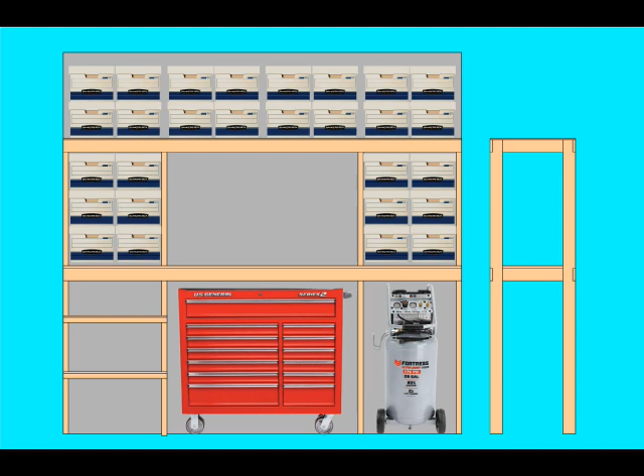Today we're building storage shelves for your garage or basement that provide a maximum of storage capacity with a minimum of space, and even better, at a minimum of cost. And for a bonus, they can be built to include a sturdy workbench and can be easily accessorized to add even more workspace and storage capacity.

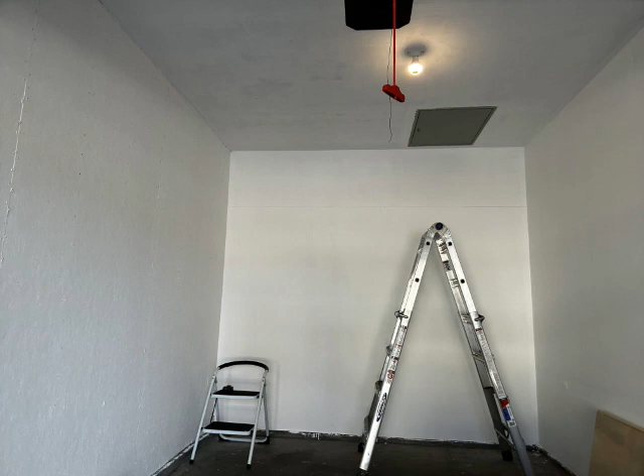In this first of two parts, we'll help you to adapt the design to fit the space that you're using, and then walk you step by step through the building process for the basic structure. In the next video, we'll show you how to add to that structure if you'd like, to make it even more perfect for your own workshop or storage space.

The concept that makes this unit special is the application of engineering principles to reduce the size and the amounts of wood required without sacrificing structural strength. This keeps the cost of the project down and maximizes the use of space.

Like most DIYers, I've built many shelves and workbenches over the years, and my usual go-to plan for making them heavy-duty was simply to add bulk to the wood sizes. Many a bench has been built of 4x4s and multiple layers of MDF, and they all weigh a ton and take up a ton of space.

This time, however, I was tasked by my neighbor Piper to build a shelf unit in her garage that would double as an equipment storage unit and also a workbench. Hers is a single-car garage, so the unit was limited by that dimension in width. But in that space, she needed enough shelf space for storing not only a lot of household items, but also a rolling tool chest and a compressor.

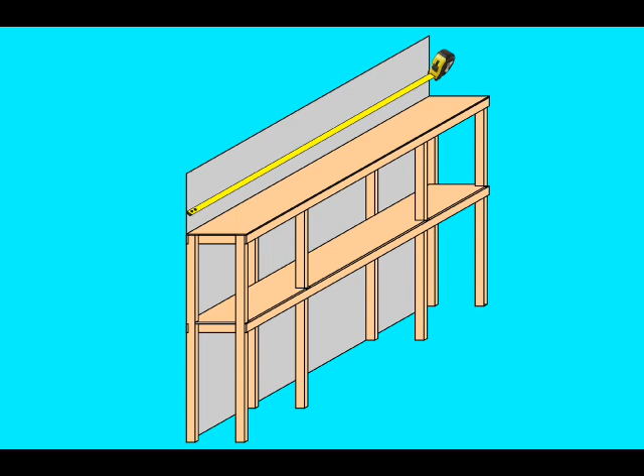As always, it's best to start with a plan, so I measured the rear wall of her garage, shown here in gray, and made scale drawings of the space. I also added scale images of the tool chest and the compressor so I could set the height of the lowest main shelf, which would also be a workbench, and also the position of the vertical posts.

Note that the shelves in this case are only ½ an inch thick, but they're faced with a 1x4 board, which is part of the structural concept. For a stronger bench, you could substitute thicker plywood at an increased cost. Also note that the posts are 2x4s.

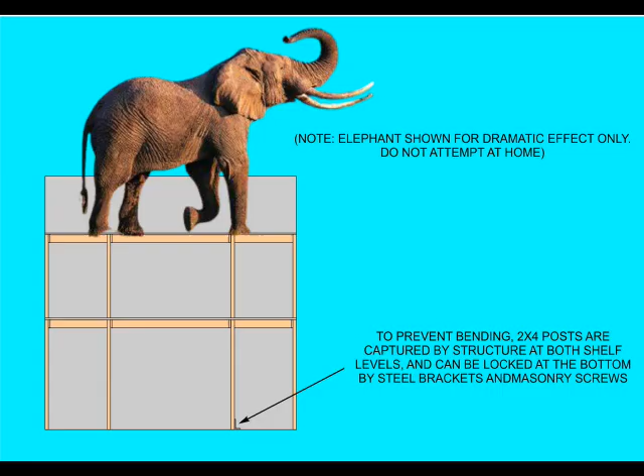This keeps the footprint of the posts small, and as long as they're properly supported, they'll carry a surprisingly large load. In fact, a single regular 2x4 is rated to support as much as 1,000 pounds vertically as long as it's supported to prevent bending. And since we're using 8 of these 2x4 posts, that's a combined weight-bearing capacity of 8,000 pounds, which coincidentally enough is about the weight of a small elephant.

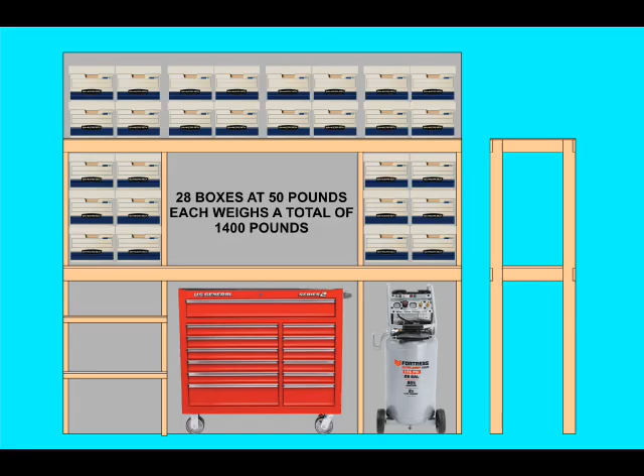And of course, I wouldn't sit under that structure with an elephant on the top bench, but the point is made. The heaviest box of storage materials that I have is some reloading equipment, and that box weighs about 40 pounds. And most of my wife's decorating materials have an average box weight of less than 30 pounds, and I think the heaviest one has candles in it, and that might be 35.

So theoretically, if I filled up all 28 of these boxes with 50 pounds each, which is a lot, I'd still only have a total load of 1,400 pounds, which is so far below the capacity of 8,000 that I hope you begin to realize how overbuilt so many garage benches and storage shelves are.

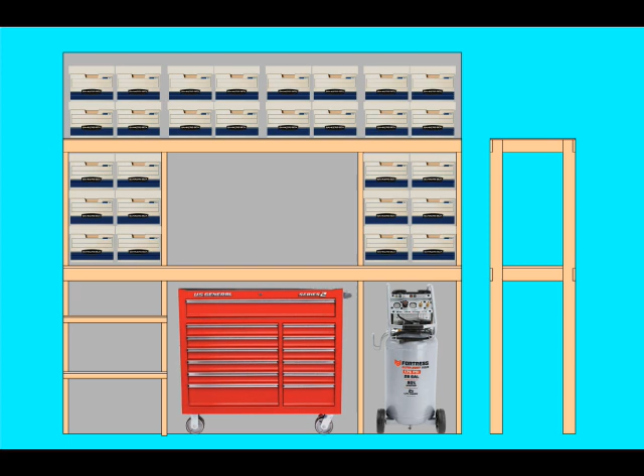Now that we've discussed the structural concepts of this unit, let's take a look at some of the more specific design features that you might want to modify to suit your own particular needs. If you're planning to use the center area to store a tool chest, as shown here, don't forget to include enough space on each side to be able to parallel park it against the back wall.

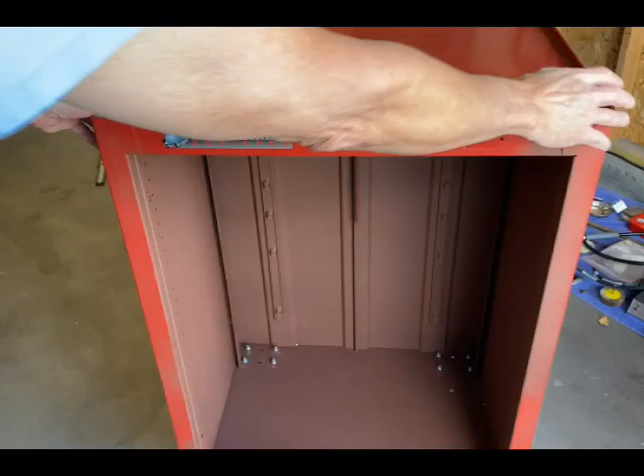If you've modified that tool chest to have 4 castering wheels, as we showed in a previous video, this is less of a problem. But a standard chest will require a few inches on either side, so set your vertical post distances accordingly.

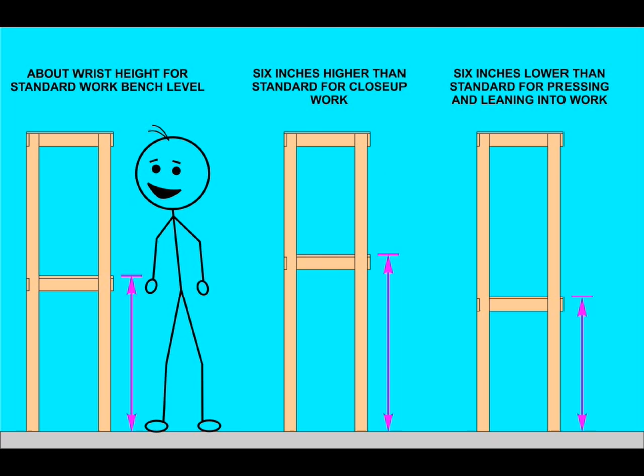Also, if you're going to use the lower shelf as a workbench, the height would ideally be lower than the one shown here. It's necessary to have a high bench top in this case to accommodate the tool chest and the compressor. But if you don't have those requirements, you can lower the bench to a comfortable height. In this case, a stand-up workbench is fine for the purposes that we're building it for.

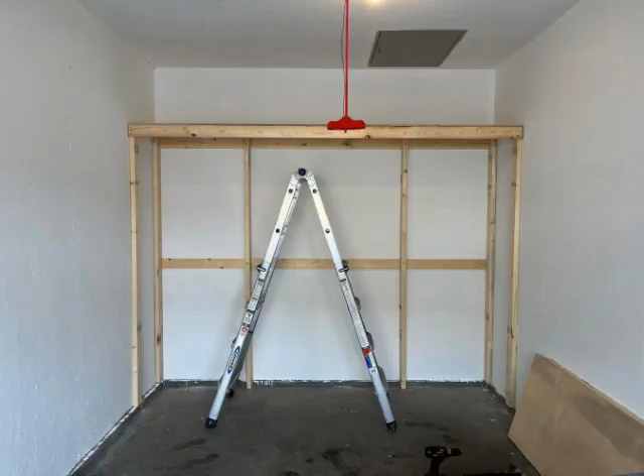Once the height of the lowest shelf and the spacing of the 4 vertical posts is decided, the other shelf position, the upper one, is determined by your ceiling height. We built this one to allow a double stack of banker's boxes because we had enough ceiling height for that. Banker's boxes aren't just a random choice for planning purposes either.

The ones shown, which are Storfile 701s, are a great way to organize your household and garage storage. I keep many of my specialty tools and equipment in them, and my wife uses them to store all of her seasonal household decorations. She likes to redecorate for every holiday or season change, and the banker's boxes allow her to swap their contents each time she redecorates.

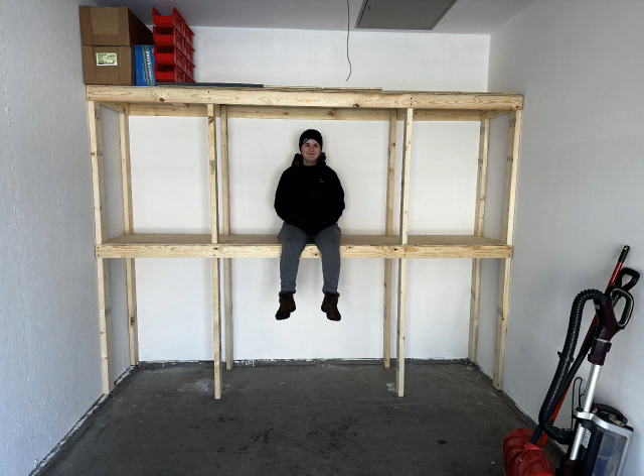So in this design, I used the dimensions of the 701 box to determine the shelf height and also the shelf depth, which is 2 feet. And so, with all those goals in mind, we set about building our shelves. We had no problem meeting all the design requirements, but we did go over budget. Piper didn't want to spend more than $200, but I think the total price came in right around $225, well under $250 in any case.

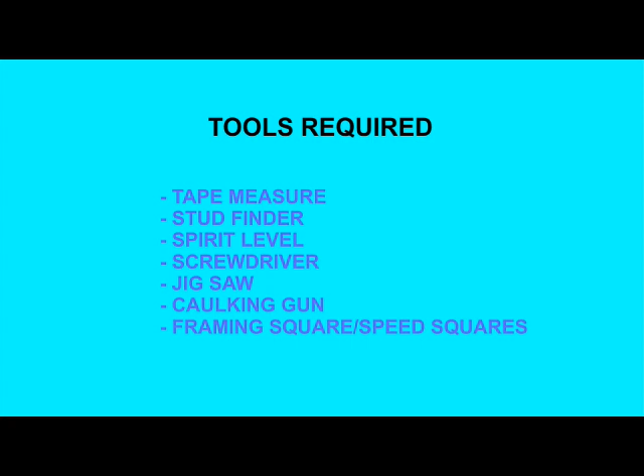We're still in the middle of winter right now, and she's going to wait for warmer weather to finish painting the shelves and adding a few extra features, but she's happy with the results so far, and so am I. Now let's walk through the building procedure step by step so you can see how we did it. Here's a list of the tools we used. Nothing special or expensive, and of course you can substitute whatever you prefer. You might not even need that stud finder depending upon what type of wall you're mounting these shelves to.

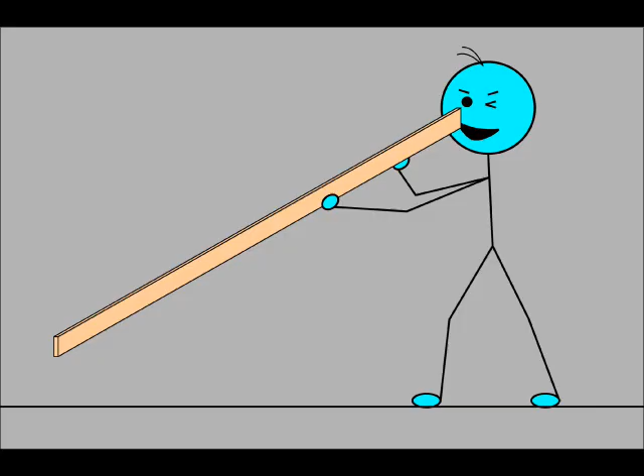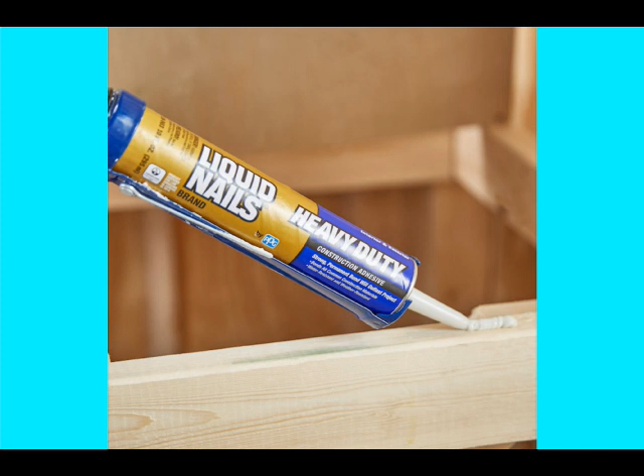Also, while you're at the store, if you can, have them cut the plywood down to the width of your shelves. In our case, we needed the shelves to be 2 foot wide to accommodate the banker's boxes, so we had both of these sheets sawn right down the middle. Now, even though you could technically assemble this whole project with screws alone, don't neglect the construction adhesive that we're recommending. The product we use is Liquid Nails. It's a very common product, but it's essential to getting the full strength out of these lighter weight materials.

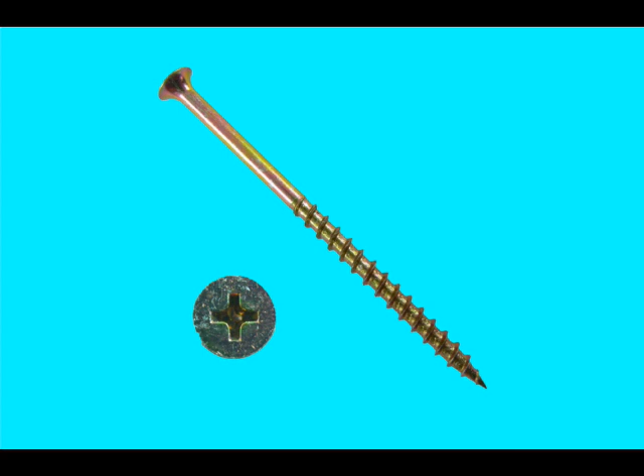Of course, you will need some screws, and we use drywall screws in several lengths, plus 8 lag screws. The length of the drywall screws could depend upon your choice of plywood thickness, so I recommend that you review the construction steps and adjust your needs accordingly before you go to the store. Actual construction begins with installing a pair of those 1x4 boards against the back wall of your garage. Now keep in mind that no garage has perfectly plumb walls or a level floor. So just pick one side or the other to take your measurements from, and then once those measurements are established, we will level these boards to those measurements.

Now, you have to decide a few things. How high will the workbench or the lower shelf be? 38 inches is a comfortable height for a bench, but in our case we had to go higher, as we said earlier, to accommodate that tool chest. Once you've picked a dimension, you have to live with it because these boards are going to be attached very firmly to the walls, so make sure you're happy with it before you move on. Then above that, we need as much space as necessary to accommodate sizes of boxes or other storage.

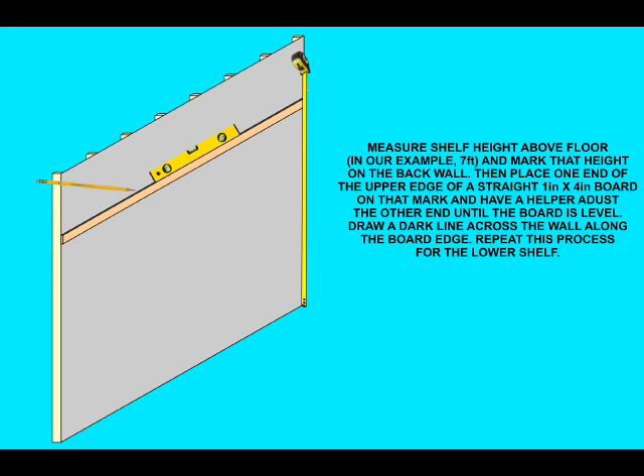You need to pick one side of the room, let's say the right side in this case, make your mark, in this case 7 feet from the floor, hold the board up to that mark, put a level on the board, and then have your partner move the other end of the board up or down until that level is perfectly straight, and then draw a nice dark pencil line across the top of the board. Make a line for both of the shelves, both the upper shelf and the lower bench shelf, and we're ready to move on to the next step.

Now that we have a couple of lines drawn on the wall to tell us where those boards are going to be attached, we need to decide how to attach them. We're illustrating here a stud wall, and that's where your stud finder comes in, and this will give you a good strong installation by using 1/4 inch lag screws to about 2 inches long, could be longer. If you use lag screws, be sure to put some large area washers under the head of the screw so you don't crush the wood too much while you're tightening them down.

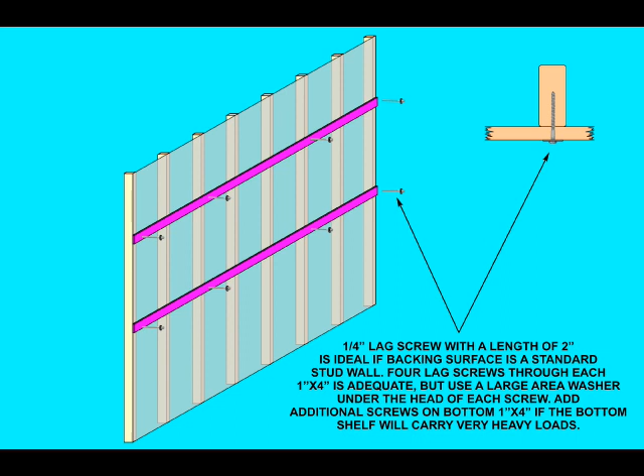Now take your time doing this. Make sure these boards are exactly on those lines you drew and that you're happy with how straight and level they are. These 2 boards form the foundation for all the rest of the structure, so we need them to be perfectly straight and level so that the rest of the assembly looks good.

Now we're going to take 4 of those nice straight 2x4s you bought and cut them to the exact height of that upper 1x4. Now don't forget that these 2x4s will all be slightly different lengths because the floor is sloped. Just put them up one at a time in the position where they're going to be attached and mark their tops where that top meets the upper edge of the upper 1x4, and then make your cut at that point. Once you do have all of them cut to the correct height, I recommend that you either number them or mark them in some way so that you can be sure to put them back in the same position when you're ready to screw them on.

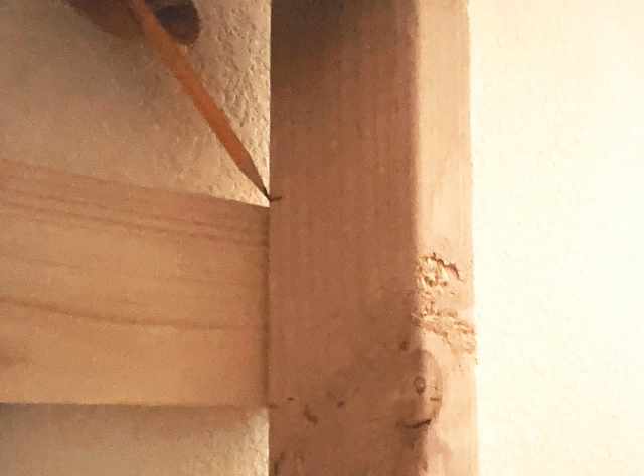Now you don't absolutely have to perform the next step, so look ahead through this process and decide if you really want to. We're going to notch these boards to set them back up against that rear wall of the garage, and the reason we're doing that is it gives us a little more open space in the second shelf, the lower shelf. If you don't make these notches, these boards will intrude on that space, and I was looking to gain every square inch I could, so I went ahead with this process. To make these notches, push the 2x4s back into position where they're going to be up against those 1x4s, and use a pencil to mark where the notch will have to be cut.

Once you've done that for all 4 of the 2x4s, you can lay them down on their side and use a scrap piece of 1x4 that's left over when you cut them to length, and use that to set the rear side of the notch. Make a nice dark pencil line because that's going to be our cut line.

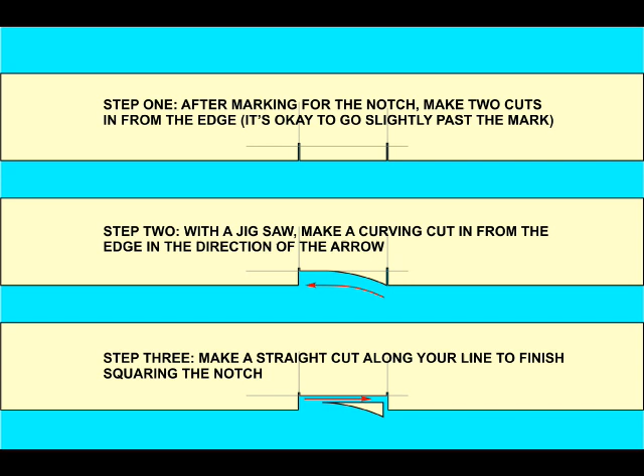Now you could go ahead and use an ordinary handsaw and a hammer and chisel to make these notches. I chose to use a jigsaw, and the simplest way that I know of to do that is to start with making a couple of cuts at each end of the notch as shown in the top drawing, and then I come in from one side with the jigsaw in a curving arc and cut over to the left side until that piece breaks away, and then come back in for another cut coming in from the right to straighten that cut over to the other side of the notch.

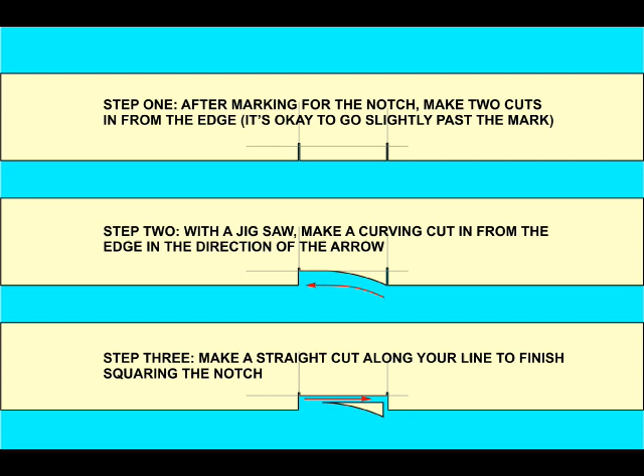Now you'll need to put each one of those boards up into position to check the fit of the notches, and don't be surprised if it's too tight to fit in some areas. Go ahead and enlarge these notches as much as necessary to make it an easy fit.

Also, don't be dismayed if these boards don't fit perfectly flat against the wall. Very few walls are actually flat, and in the case of the one we were working on in Piper's garage, that wall had more waves than Pismo Beach, and there wasn't any way we were going to get those boards to sit straight up against it. Once the whole thing is assembled, you can hardly notice any gaps like that anyway, so just don't worry about it.

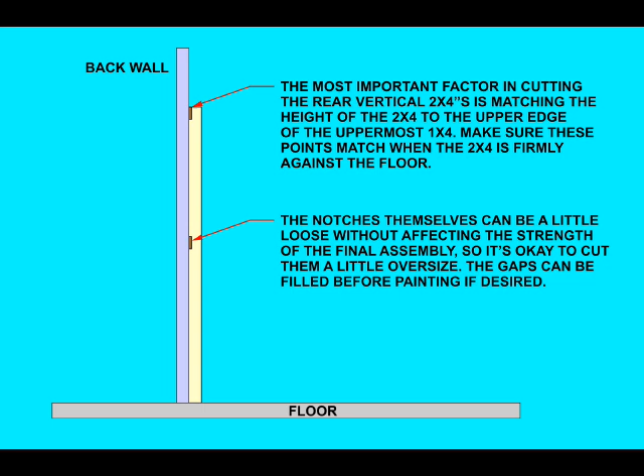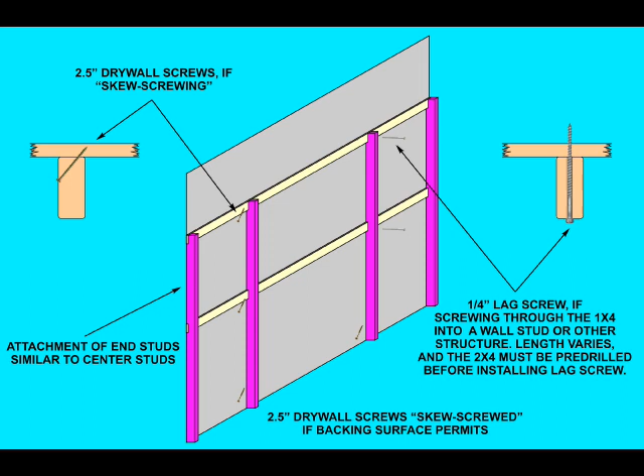The way we attached our vertical 2x4s was to angle the screws, a process called skew screwing, to anchor them to the 1x4s, and in fact our screws went on through into the 2x4 studs in the wall behind us. Of course, there's other ways of doing this, and you could even use lag screws, as it shows on the right side of this drawing, if by some miracle your 2x4s happen to be right in front of a stud in the back wall. Regardless of how you attach them, though, this is the final result, what you should see at this point in your construction.

I also recommend that you choose white as your color, and we picked the whitest white we could find and bought several gallons of it. In a garage, it's my belief that there's never enough light, and basically anything that's white in your garage is reflecting light and making it brighter, and anything that isn't white is basically sucking up the light and making things darker. So white is always my go-to choice for garage workshops.

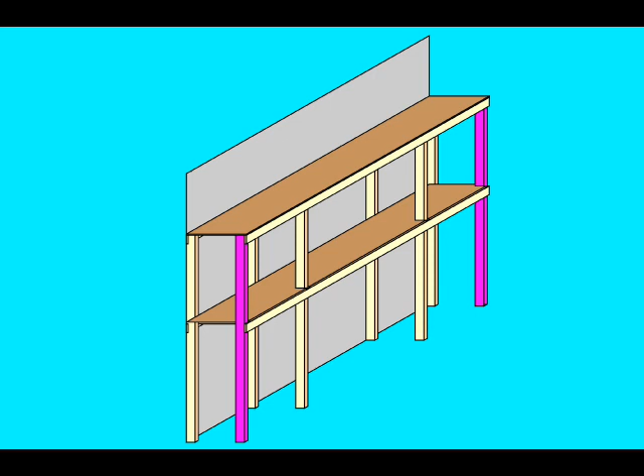Next up in our construction sequence are the two vertical posts that will support the front of the shelves, shown here in pink. These actually, on our set of shelves, will be attached to the walls on each side of the garage, but there are some options that we'll discuss later if you need one of these posts to be freestanding.

First, we have to decide how far they have to be from the back wall, however, and in our case, for these shelves to be 24 inches, these posts must be installed so they are 23 1/4 inches from the wall to the front face of each 2x4. That missing 3/4 of an inch, 0.75, will be the thickness of the 1x4 that we use as a fascia board for both the top and bottom shelves.

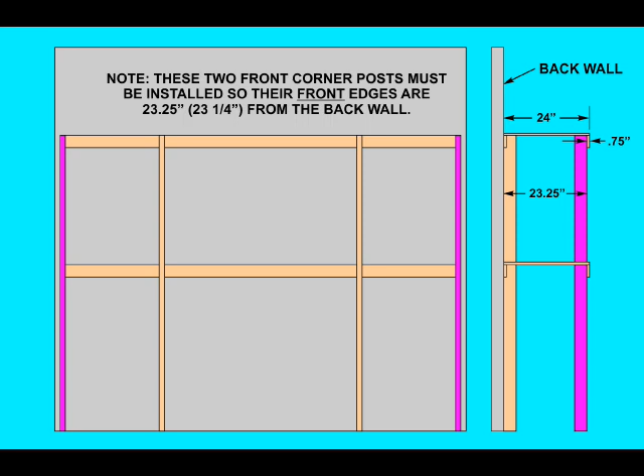So if you're going to build shelves that are 2 feet wide, these vertical posts must be 23 1/4 inches from the back wall to the front of the post, as shown in this drawing. Make sure you study that and understand it before you proceed.

For our shelves, we measured that 23 1/4 inch dimension on each wall, the right hand and the left hand walls of the garage, and then we placed our 2x4s in that position at that dimension from the back wall. We then held a level up against the post vertically to check it for plumb, to make sure that post was absolutely straight up and down, and then made a mark along the wall so that we knew where that post was supposed to be when it's finally installed.

Then it's a matter of cutting the post to length, and to do that we laid a level across from the back post, as you can see in the upper right hand corner, and marked where that level, with the bubble centered, crossed the 2x4.

Now, before we move on to the next step, I did mention earlier that these posts don't necessarily have to be attached to walls. This way we're doing it here is suitable for a one-car garage, but if you're in a two-car garage, one of those posts can be freestanding, and I suppose you could have both of those posts freestanding if your particular workspace happened to require it.

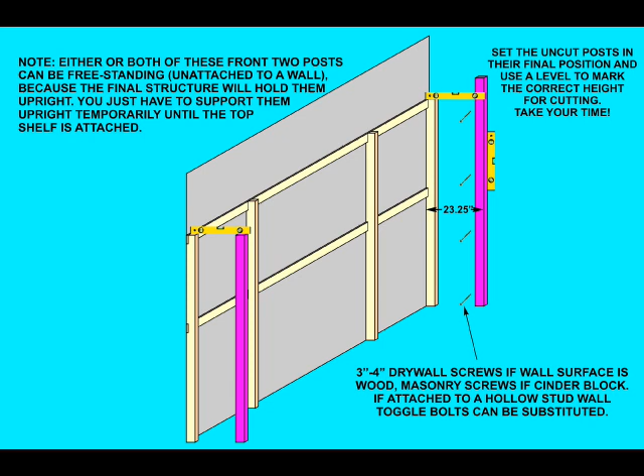You will, however, have to come up with a way to keep those posts in position until we can get the top shelf installed. And don't be concerned about strength. These posts don't need the walls to support them. It's just a convenient place to hold them while we're getting that top shelf installed.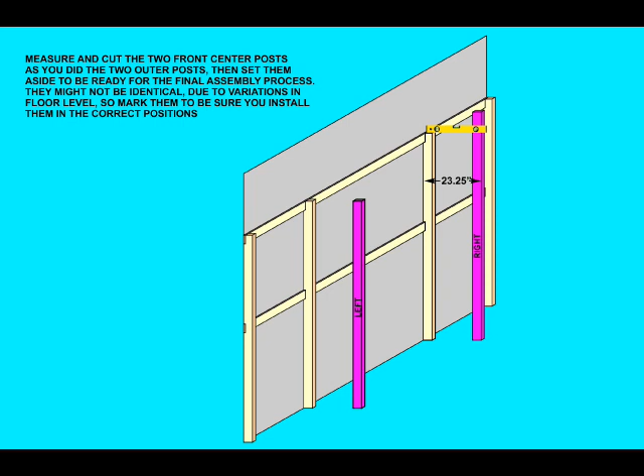Next, we're going to cut the two center front posts to length in the same manner as we did for the side posts. Now once these are cut, we're not going to install them yet. You can just put them aside until later, but you really should mark them so that you don't mistakenly swap them around. In other words, once you've cut them, they're a custom fit for that location, and they shouldn't be moved to another position.

Now that all the posts are cut to length and the outer posts are installed against the walls, it's time to build and install the top shelf. Now, since the length of the shelves that we're building is just a little under 10 feet, the 8-foot piece of plywood that we have cut is too short to make the full shelf length. This is what those two short pieces labeled the top and bottom shelf end sections are for in the second sheet of plywood that we purchased.

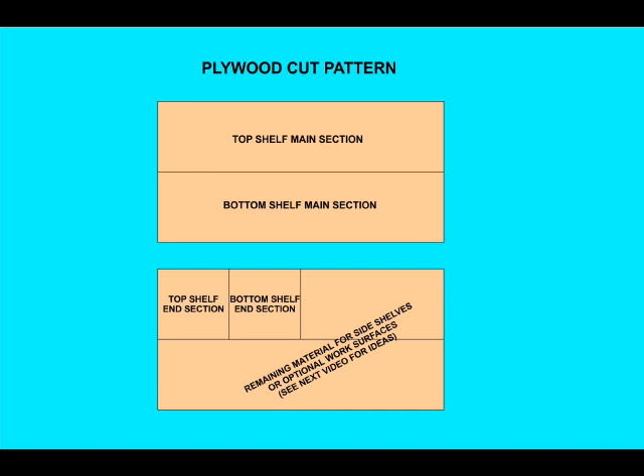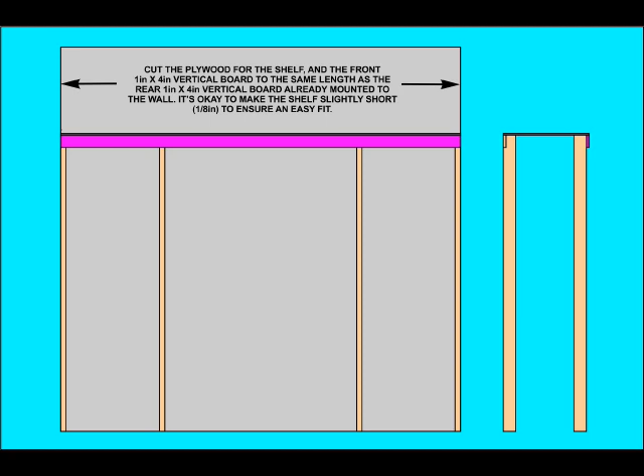Now we can't be exact about the length without measuring the precise space between the left and right walls of our garage or the work area that you're building into. So each of these shelves is going to be custom fit again to the space required. In our case, the total shelf length is going to be 114.5 inches. And since the length of the plywood board is 96 inches or 8 feet, we will subtract 96 from 114.5 to give us a remainder of 18.5 inches. That will be the required length of the top shelf end extension, and we're going to go ahead and cut that with the saber saw.

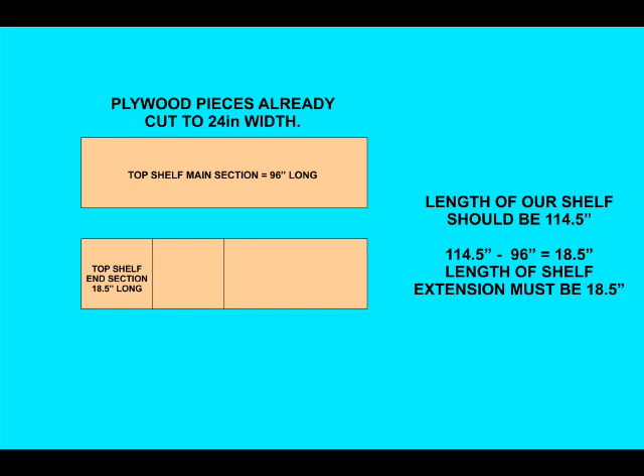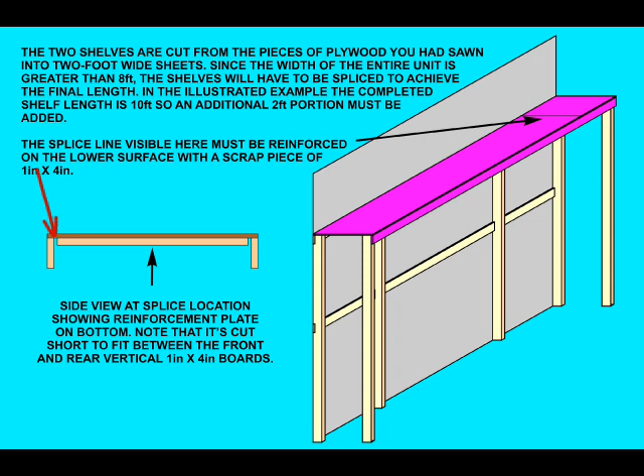As it shows here on the left side of the drawing, we're going to use a piece of 1x4 material as a splice plate to hold the ends of these two pieces of plywood together until we get it up into position. Now notice in that drawing that you need to cut that splice board so that it fits between the 1x4 boards at the front and the back of the shelf. Notice that I've drawn it with a pronounced gap at the front and the back of that splice plate to make sure there's plenty of room for those vertical 1x4 boards.

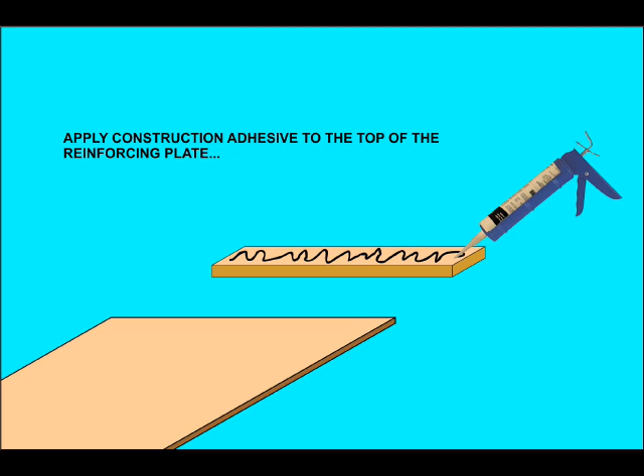Now it's time to break out that construction adhesive and load it into your caulking gun. Spread a good amount of this across the top surface of that reinforcing plate, and then carefully lift one end of your main shelf section for the top shelf, that's the 8-foot long board, so that it covers half of that reinforcing plate. While you're moving that piece of plywood into position, I recommend you place some scrap pieces of 1x4 material under it to help hold it level, and then fasten it down with 5 or 6 1 to 1.5 inch drywall screws to hold it tightly in place while the construction adhesive sets.

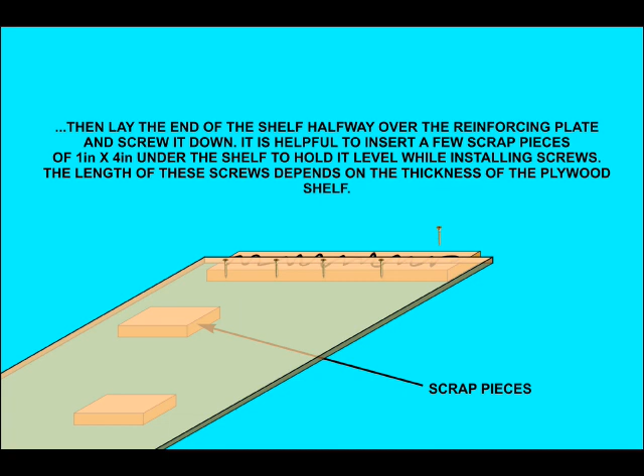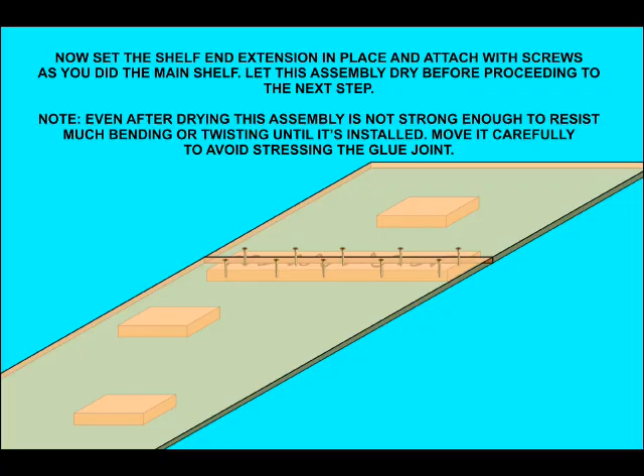Before that glue does set, however, bring your extension piece, the one that we cut to 18.5 inches, and push it tightly against the end of the main piece of plywood. Then screw it in place in a similar fashion, and then leave that assembly for at least an hour or two to dry. When you're finished, that joint should look something like this, with virtually no gap visible at all.

The next step is to finish assembling the top shelf, and we do that by adding the 1x4 fascia board. But before we screw it on, we want to run a bead of construction adhesive down the entire top edge of that 1x4 board. Now this can get messy and it's kind of hard to clean this stuff up, so I strongly recommend that you make a thin bead when you do this. In other words, don't apply too much glue because it's going to squeeze out and you'll have a mess to clean up.

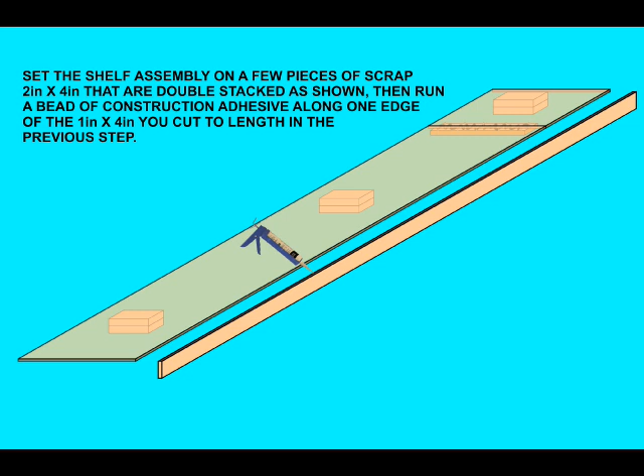Notice that I show the shelf is sitting up off the floor on some scrap 2x4s. And I did that just as a convenience to make it easier to get that 1x4 underneath it and attached without smearing too much glue around. Once you have the 1x4 safely in position under the edge of the plywood, you can go ahead and screw it down. Now you can use 1 inch to 1.5 inch screws, but use plenty of them. I think we put about 1 every 6 inches on the shelf that we assembled. The reason we use so many is I want that glue to have a good strong bond, and the screws are primarily there to hold the two parts together until the glue sets.

Double check while you're putting the screws in that the 1x4 board stays flush with the front edge of that piece of plywood. The more accurate you are with the alignment of this assembly, the stronger and more attractive the final structure will be.

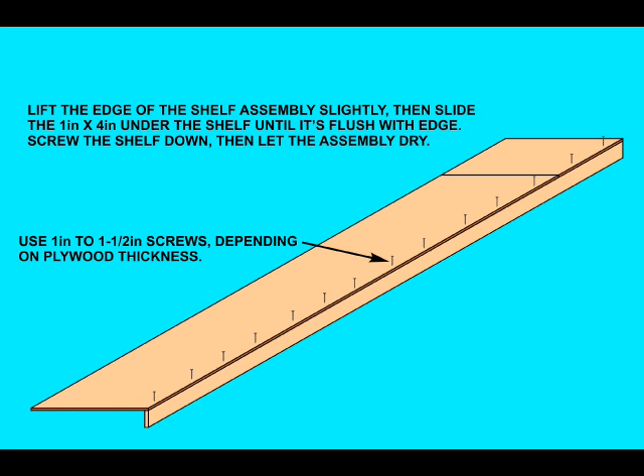Once that completed shelf assembly is dry, it's time to lift it up and put it in position. It's definitely a good idea to have 2 people and 2 ladders to do this to keep from bending the shelf too much until you get it up against the wall where it's supported at the rear by that 1x4. Once you do get it in position though, you can screw it down, and I don't recommend that you put construction adhesive along that back 1x4 board for the simple reason that you don't need it. It's held rigid by being attached to the wall, so it doesn't have a problem with flexing. Just secure the rear of the plywood with some of those 1.5 inch screws down through the plywood into the 1x4 like you did on the front face.

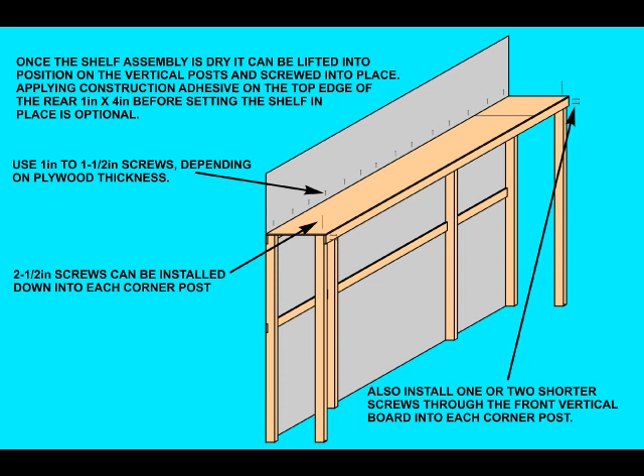Now take a couple of 2.5 inch screws and drive one down through each front corner through the shelf into the 2x4 as it shows here. And then add a couple more of those 1.5 inch screws through each end of the 1x4 board into those same vertical 2x4s. At this point, that shelf is pretty strong even without those 2 center posts, and in fact Piper just climbed up the ladder and jumped on top of that shelf to put in the rear screws. I don't recommend that you do that because you really do need those center posts for full strength, but it did show how tough it is even without them.

And now we're down to the home stretch with this project. Time to assemble and install the combination shelf and workbench. Essentially, it has a lot in common with the upper shelf, but it's different in 2 very important ways. First of all, after we assemble the 2 portions of plywood, we have to notch them to fit around all of these 2x4 posts. Once we get those notches accurately cut and tested the fit of the plywood, we are going to insert the plywood shelf, clamp it into position, and then install the 2 center 2x4 vertical posts.

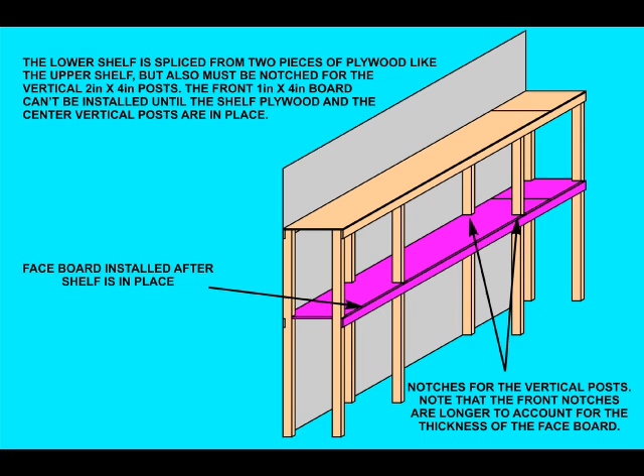Once we have the 2 center posts placed in position and checked for plumb, we will finally install the front 1x4 board, completing the whole assembly. Start building the lower shelf the same way you did the upper shelf.

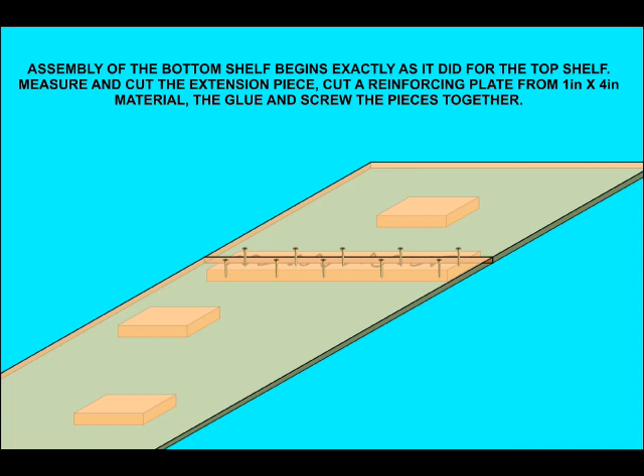First, measure from wall to wall the distance between the right and left ends of the entire structure. Then subtract 96 inches from that. The 96 inches represents the longer piece of plywood. Your remainder then will be the length of the extension piece that you're going to cut with your jigsaw, and then once you have that piece cut, you can attach it using the same process of a reinforcing plate on the back with some construction adhesive and screws.

Once that assembly is dried completely, we need to mark it for the notches to accommodate those vertical posts. There are several ways you could do this. I suppose you could just measure it all with a tape measure and transfer it onto the board, but we chose to lift the shelf assembly into place as shown here, and then marking the position of the rear posts on the back edge of the shelf.

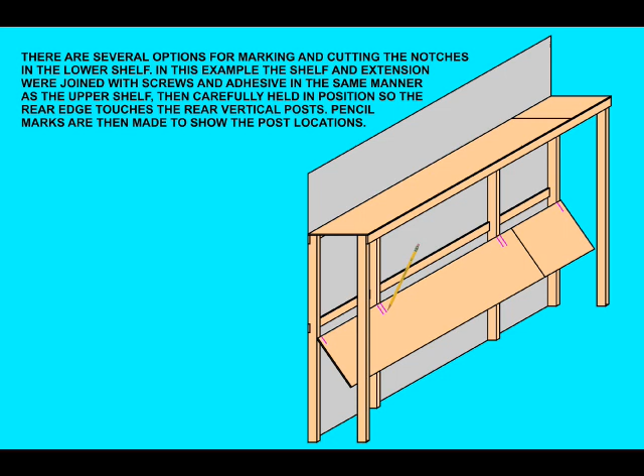Now we can set the shelf back flat on the floor and extend those marks that we made all the way across the board from the back to the front, the lines shown here in pink. Now use a piece of scrap 1x4 to make marks 3/4 of an inch back from the front edge of the board as shown. Now use a piece of scrap 2x4 to mark the ends of the slots for all 8 of the places where we're going to notch for the vertical 2x4s.

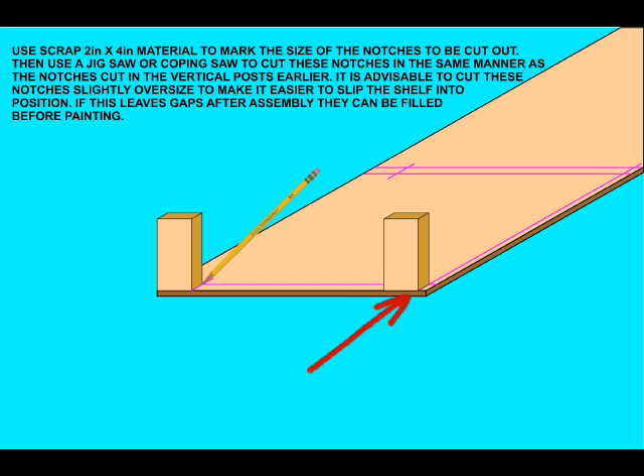Now test the fit of those notches by angling the shelf in the way you did when you were marking for the notches and see if they fit. And don't be surprised if one or more of those notches is a little too tight and you have to take it back out and enlarge it a bit with your saw. And if you accidentally make any of those notches a little bit too big, leaving a gap, don't worry, we can easily hide it. And in most cases you won't even notice once the whole thing's assembled anyway.

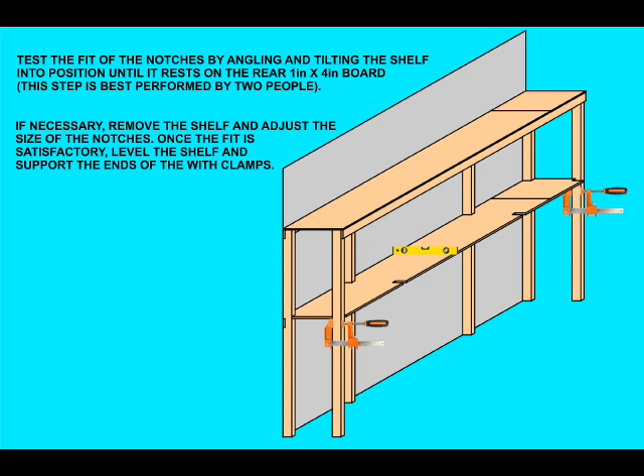Once you're happy with the fit, put a couple of clamps under the corner posts to hold it roughly in position. You can put a level across it at this point, but it's not important that it be perfect yet. Here's what ours looked like at this point, and you can see there's quite a bit of sag in the middle because we haven't got the front 1x4 in place yet. So that's why you don't really need to worry too much about leveling it.

We are using bar clamps. You can see a pair of them on the floor, and the two that are holding the shelf up are almost invisible. You definitely need a bubble level for the next step, so we started looking around for ours on the floor, and feel free to laugh when you figure out where we left it.

Now it's time to put in those last two vertical posts. Now be sure you put them in the correct position. We marked them carefully to make sure that we knew which one is on the left side, which one on the right. Angle them in at the top so they slip under that upper 1x4 and then slide them back into their respective notches. They should be a reasonably tight fit, but you may need a couple of clamps to hold them up in position.

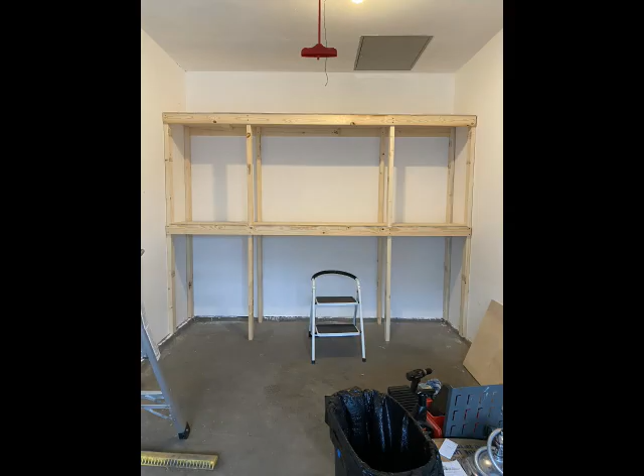Set a bubble level on each one in turn and adjust them back and forth until they're perfectly plumb. Before you attach them, however, step back and take a look at them. You'd be surprised how accurate your own eyeballs can be at aligning things. Even if they're not perfectly plumb, it's better if they line up with the rear posts. Regardless of whether those front posts are perfectly plumb, if they don't line up with the rear post, the whole thing's going to look a little wonky and your craftsmanship will be criticized.

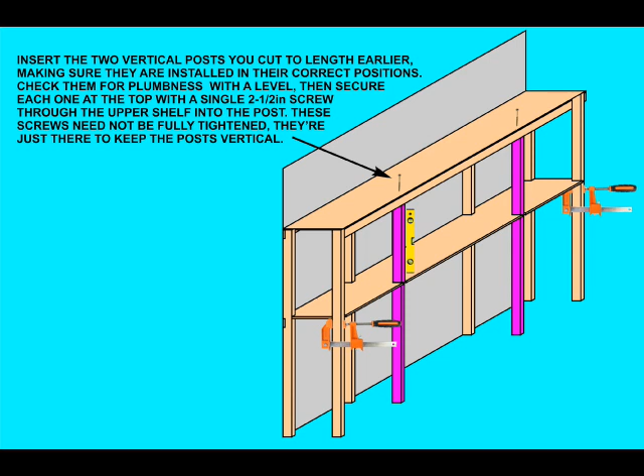Once you're happy with how those posts look, secure them at the top with a 2.5-inch screw. With those center vertical posts in place, we can install the 1x4 faceboard. This is going to take some juggling because there's already a couple of clamps, one at each end, holding that shelf up, and you're going to have to move them in order to get the 1x4 board in there.

First, run a thin bead of your construction adhesive along the top edge of the 1x4. Have your helper support one end of that shelf so you can take that clamp off. Then you can slide the 1x4 into position under that end of the shelf and clamp it in place. Do the same thing to the other end, and then loosen the clamps slightly one at a time and move each end up and down, watching your bubble level until you have that bottom shelf perfectly level and you're happy with it in its final position.

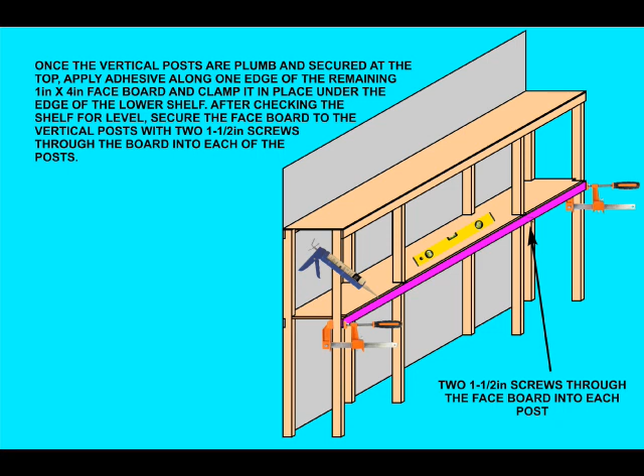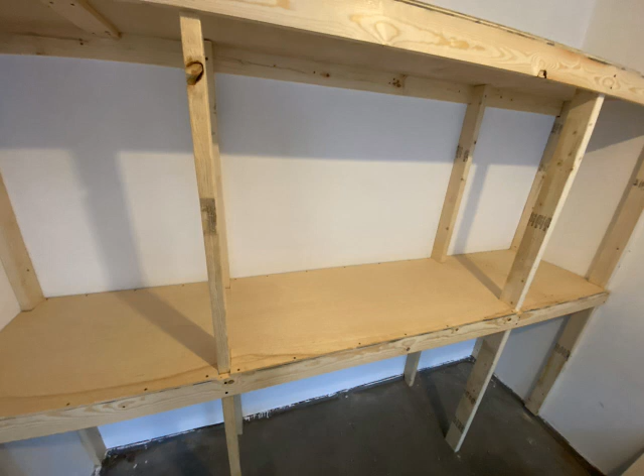Now drive a couple of 1.5 to 2-inch screws through the faceboard into each post, and then drive some 1.5-inch screws down through the plywood surface into the 1x4 rails at both the front and the back like you did for the top shelf. Hopefully all has gone well and your shelf assembly now looks like this. If you have any glue squeeze out, like you can see here along the top of our bottom 1x4, that sort of smudgy gray line, it can be wiped up with alcohol so you have a clean surface to paint over.

Additional minor considerations regarding aesthetics are these little spaces left over from cutting the notches in that plywood shelf. We just cut some little scraps of plywood and stuffed them in there with some construction adhesive. Once the adhesive sets up, you can sand those pieces flush with the rest of the material so that it will disappear once it's painted.

The final step in part 1 of our 2-part video series will complete the structure and turn it into a strong and very durable unit. We're going to cut pieces of our remaining 1x4 material to run as cross pieces between the front face board and the rear face board as shown here in pink. If possible, cut each board so that it will fit snugly in place, and that way it will hold itself there while you're installing the screws.

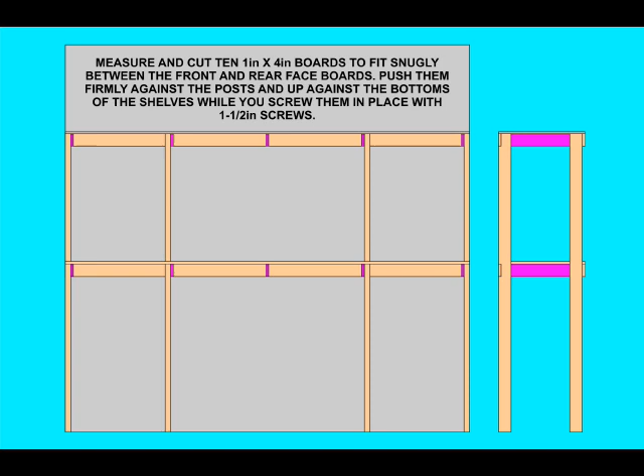Apply some construction adhesive to the top of each board when you're ready to install it, then push it into position and drive a couple of 1.5-inch screws sideways through the ends of each of these cross pieces into the 2x4 vertical posts. Then go up to the top of the shelf that you're working on and drive at least 3 or 4 more of the 1.5-inch screws down through the plywood into each of these cross pieces.

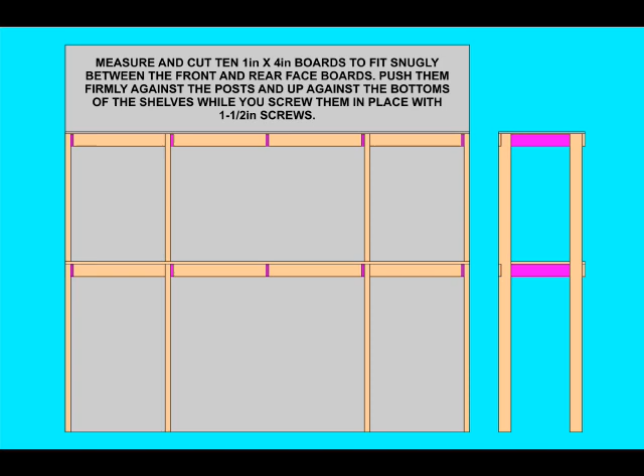Since the bottoms of the 2 front vertical posts are unsecured, we installed some metal angles with masonry screws. If you decide to do the same, you don't need to use angles this big. I was just using up some odds and ends that I had in my leftover hardware supply.

And with that, our storage shelves and workbench unit are complete. It's very useful as is, but there are several possibilities for enhancing it with some added features or even beefing it up if you're planning on putting some very heavy loads on your workbench portion in the center. I can even think of a few ways to increase the bench area by incorporating some folding work surfaces. We'll discuss all of those ideas in the next video.